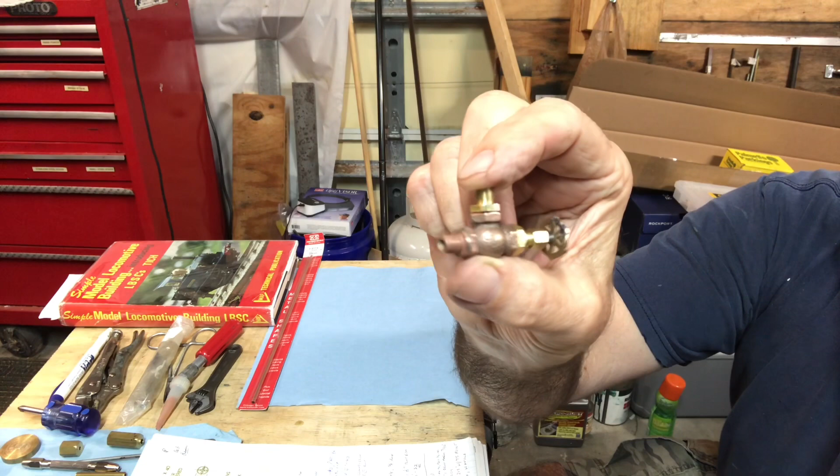We're working on an LBSC Tich locomotive and got a lot of it done if you're following the series. This week we've completed the blower assembly for the boiler fittings, and there's a lot more than two parts to it, but there's what they call the throughfare nipple, which I made out of bronze, that'll go in the front of the boiler. There's also, in the smoke box area, the main fitting itself, and then there will be, and I'll custom fit this at the appropriate time, 5/32 inch copper tube that will be cut and threaded on the ends.

Here's a drawing from the book. If you're following along, this is what we're making this week. So if you're interested, I'll show a couple of techniques and things that worked well. I'll show an error that I made in trying to make the valve stem. I made it too short the first time around, but it was good practice.

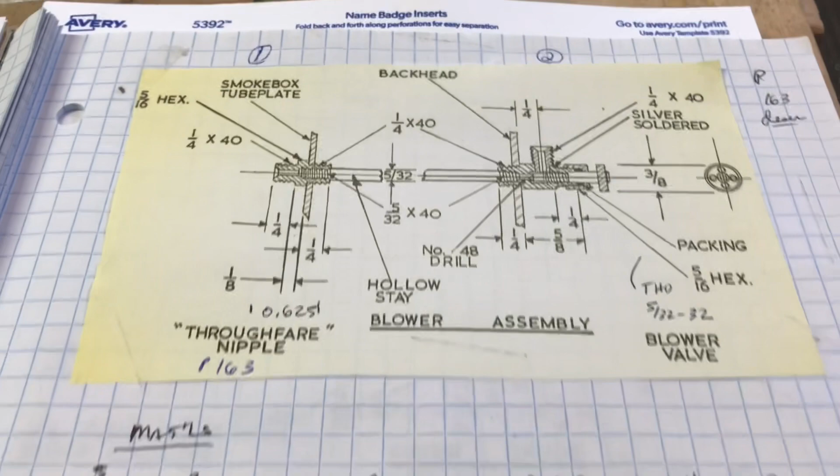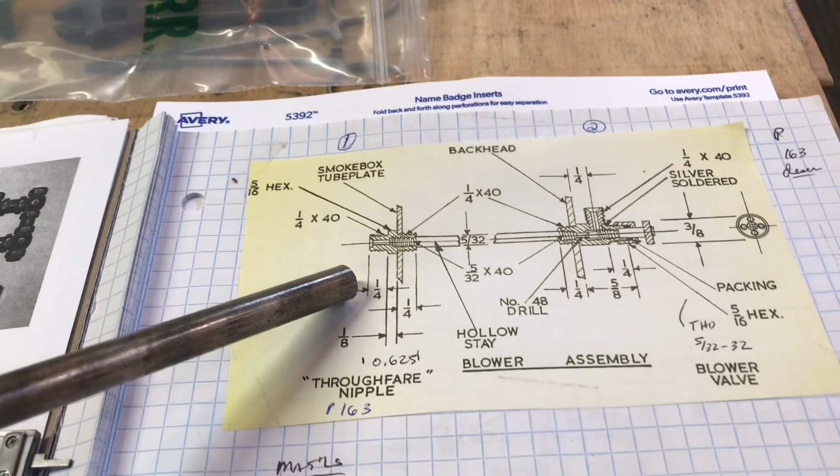The next part I want to make is the blower assembly, which is obviously at least two main parts and then a pipe that connects them. I'm going to start with what they call the throughfare nipple, and I want to point out that this assembly, once it's in the locomotive, forms a structural member in the boiler, and I do not plan on taking it out, so I'm going to make these parts as you would properly for a permanent part of the boiler and use bronze versus brass. Julia pointed that out. It is a best practice to use bronze for the boiler, although if you read the book, LBSC talks about using brass.

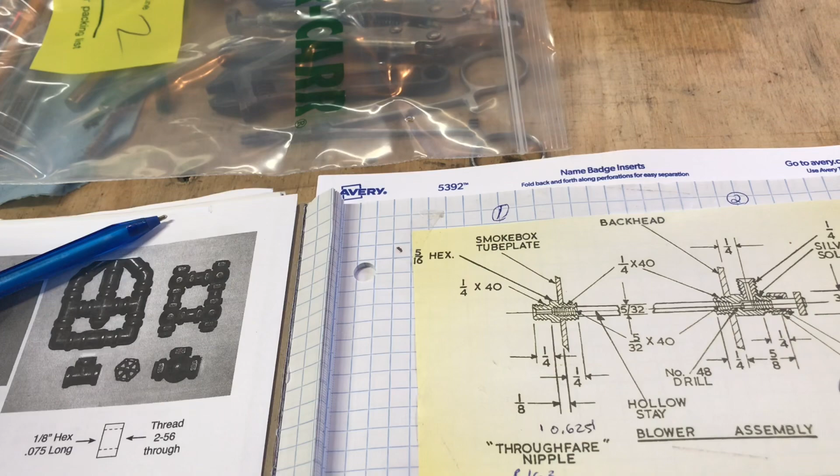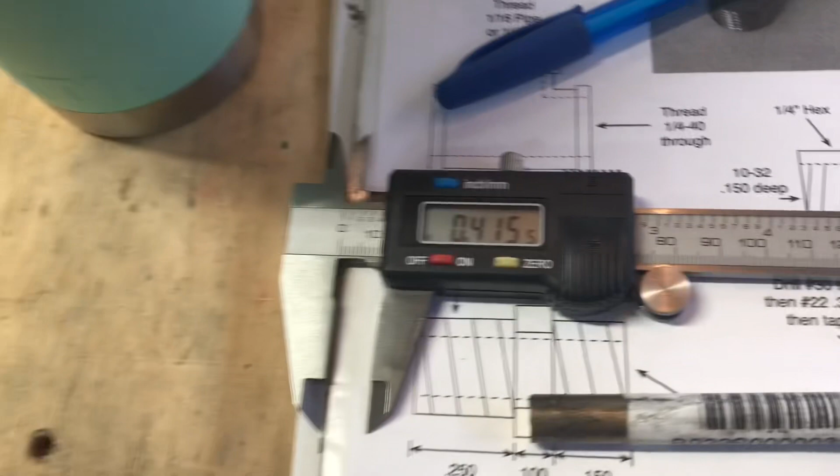Well, I don't have any hex bronze, so I ordered some 3/8 inch bronze rod from McMaster Carr. It wasn't terribly expensive, and my plan is, I'm going to put this in the lathe and turn down a section. This is oversized. It's actually like 415 thou outside diameter, and it's called 3/8 inch, so it won't fit in a 5C collet like it is.

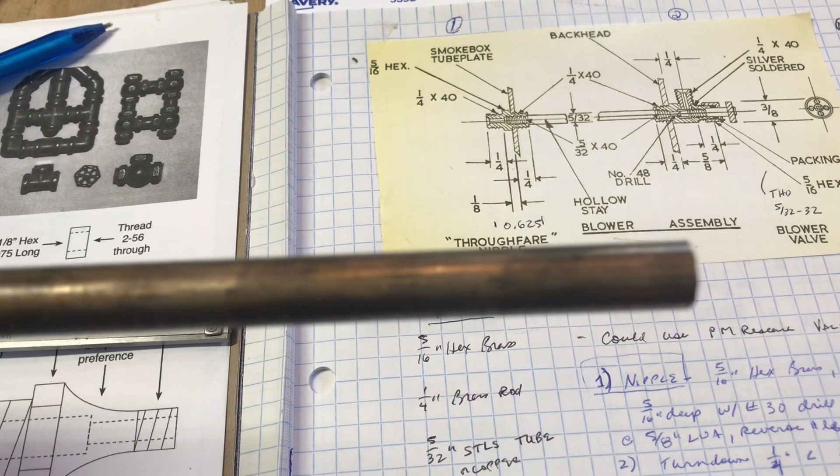I'm going to turn down a significant section of this to actually 3/8 of an inch, and then cut it off so that I can use the 3/8 inch diameter part in a 5C collet, and then use my hex collet block to machine a bunch of this down to a 5/16 inch hex, and then I can start making the part. So I'll show you that briefly.

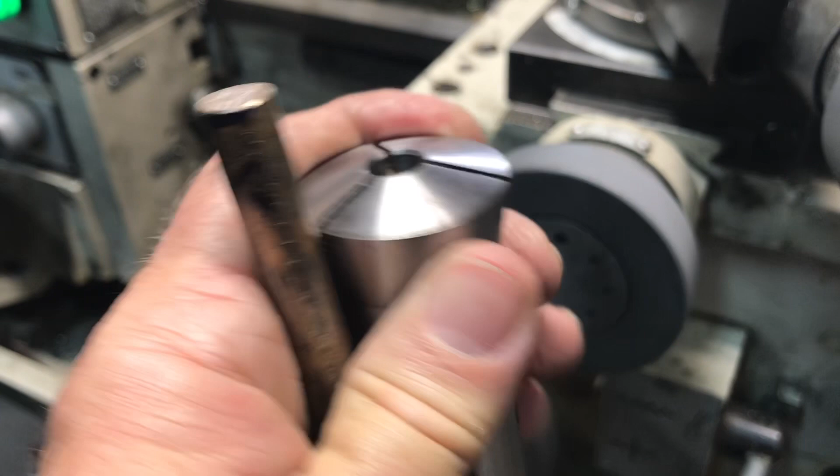I have something else up my sleeve too, because I'm seriously considering using the PM Research globe valve bodies for this part rather than just making it out of stock, but we'll see. I'll talk about that as we go along. Okay, here's the bronze stock turned down to 3/8 of an inch and the 5C collet that I hope to use to make some hex stock.

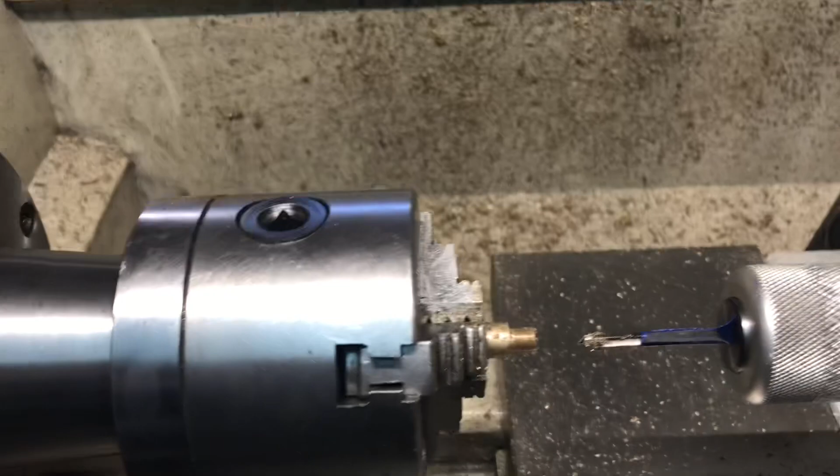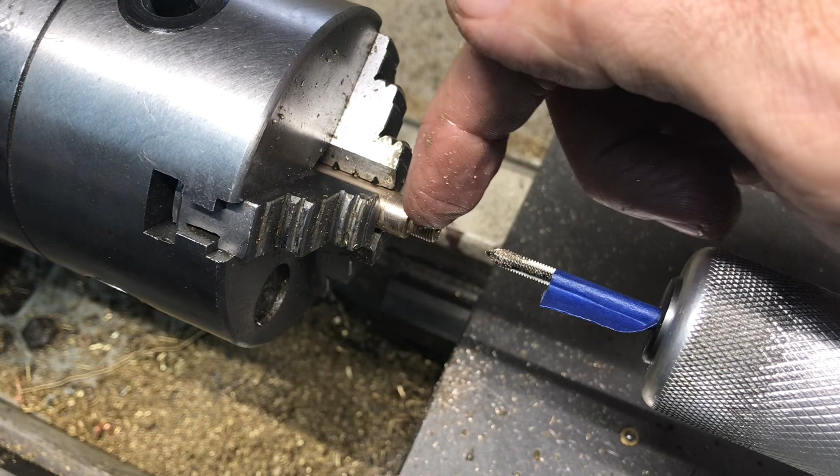In the process of doing this, I kind of messed up a short portion of the bronze, and rather than wasting it, I've decided to go ahead right now and make basically the inner half of the valve that will go on the back where the blower is, where I'm planning to use the PM Research globe valve. So I machined this piece down, 1/4 inch by 40 threaded, 1/4 inch long, drilled it through with a number 48, and then I pilot drilled it and just finished tapping this 5/32 40.

So this will be the part that accepts the pipe that stays inside the boiler as kind of a permanent structural assembly. So now I can take this out, flip it around, and machine the other side. What I'm going to do is leave kind of like a wafer thin division point here, just to make it easy to screw in and out of an adapter, make it easy to screw in and out of the backside.

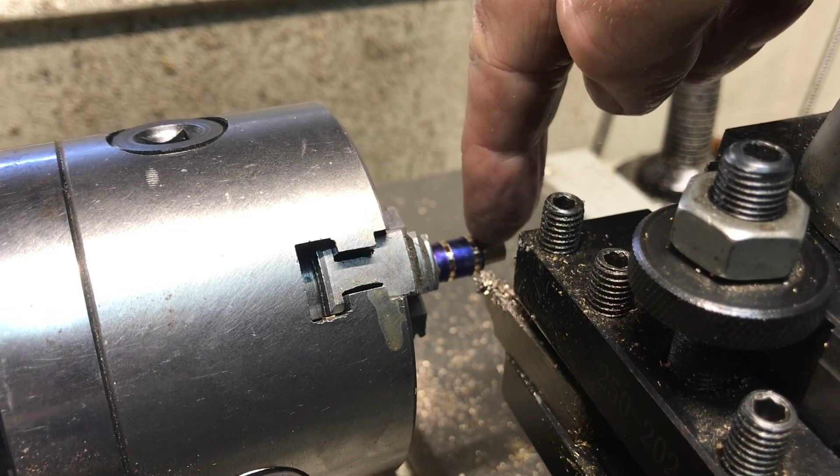So this side is machined like LBSC designed. The flip side is going to be machined like John Bailie designed, so I'll show you that in a minute. I've slid the part out. Ultimately, I'm going to cut it off 5/16 from the rim here. So I'm making a 1/16 inch rim, and then a 1/4 inch portion, which is going to get turned down to a 1/4 inch and threaded, and it's going to have a certain size hole drilled in it for the valve.

But before I remove all this, the best way to support it is by using the existing stock there. If you can see that, yeah. So what I'm going to do, I've made my marks with my cutoff tool, and I'm going to just work it back and forth to work that portion down as close as I can get to a 1/4 inch outside diameter before I cut it off.

Okay, that worked out nicely. So I've got this part down to a 1/4 inch diameter. I got this nice little rim here. It's a 1/16 of an inch wide. That'll be like the buffer in between the boiler side and the valve side here. So all I got to do is cut this off, turn this around. I'll put this in a 5C collet chuck, a 1/4 inch one, because there's not a lot to do. I'm not going to hurt these threads just by threading and drilling this side here.

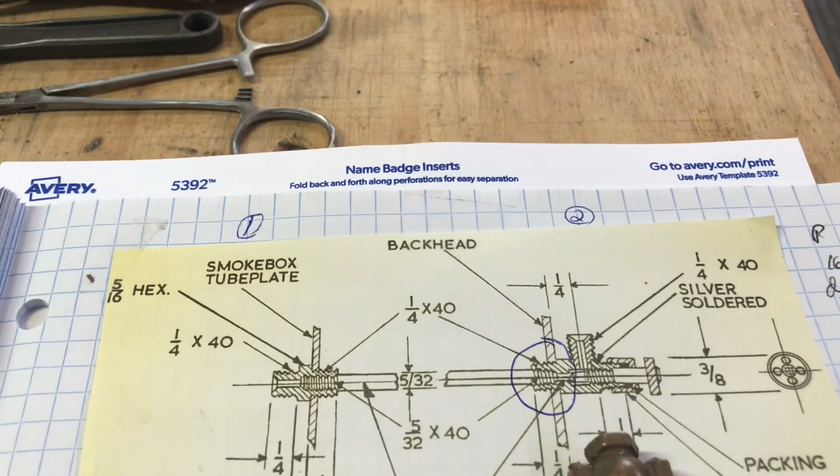Okay, I said the wrong thing. The inside portion of the adapter is only 150 thou long, so I did have to trim that off, and I drilled it number 30 to accept the larger valve. And so what I'm making here is basically the circled portion. This part will go inside the boiler, and it's been threaded to accept the pipe, the 5/32 pipe that will go in and become a structural member.

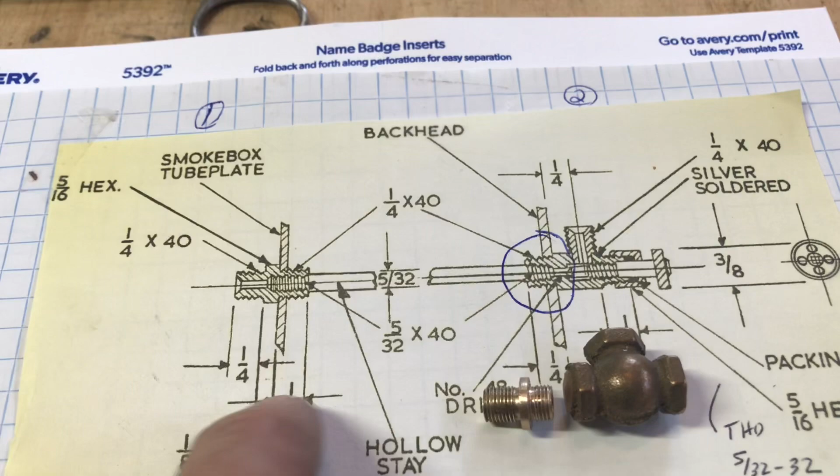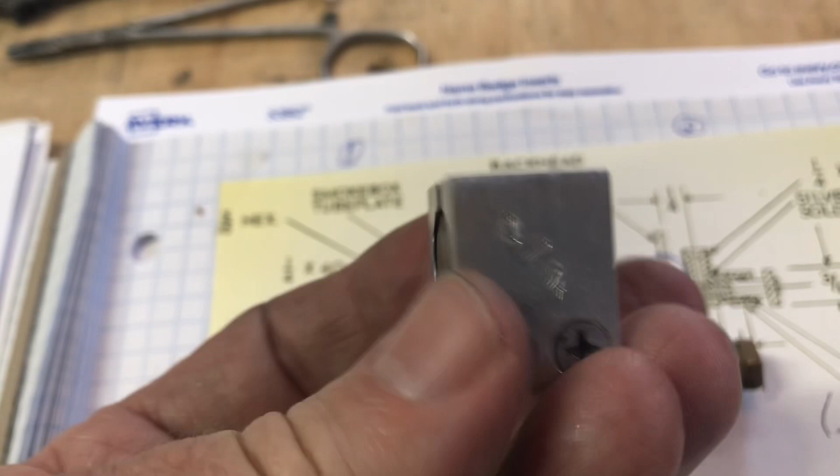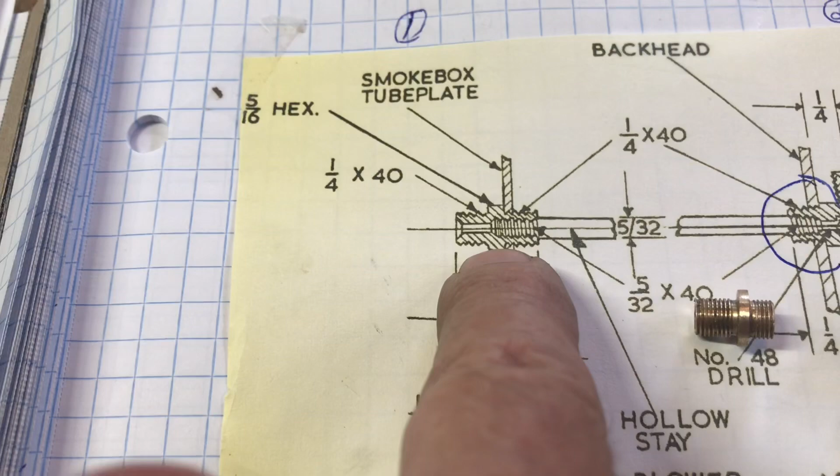This is one of the PM Research valve bodies, and I'm planning on using one or the other of these. This is the little machining jig that I've made for them. I showed this before when I machined a T for a prior part for the boiler clacks. So easy to make out of some aluminum. You definitely need this if you're going to machine these things in the mill. So we'll see about that. Now, speaking of the mill, we'll go over and see if we can make some 5/16 inch hex stock out of bronze with that first piece that we cut off.

The design I'm talking about was published in the Home Railway Journal, a U.S. publication, summer of '09 issue. The gentleman who designed these things, John Bailie, he just recently passed away. The magazine was published by Matt Mason. I don't know if past issues are available, but you could contact Matt Mason. He's active on the Chaski metalworking group under the live steam part, and he could probably provide reprints of this article.

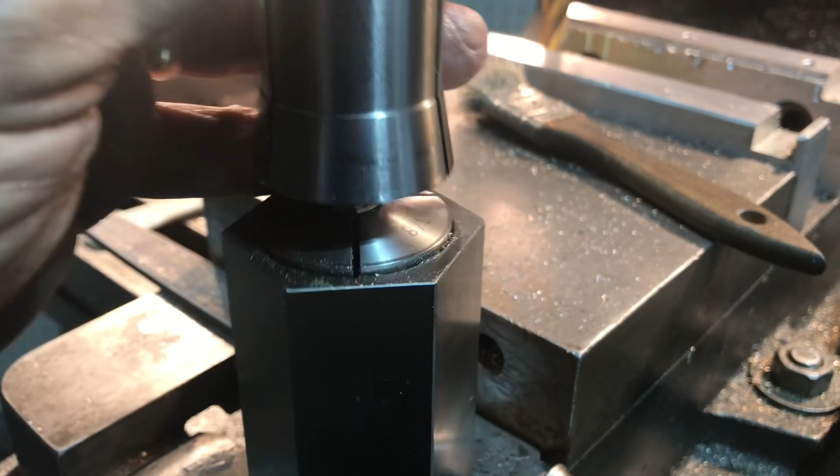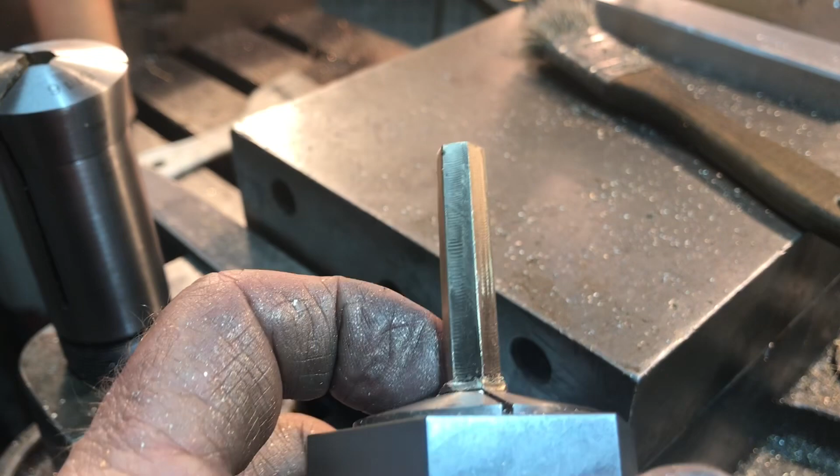Okay, that came out pretty good actually. I was just checking the fit with my 5/16 inch hex collet, and as you can see, you can only do a couple of inches this way at a time. I tried to do it longer, but it was not having it. I was chewing up the end a little bit, even though I had the end supported. So I did cut off the other section. I'm going to leave this together like it is so that I can use this part, get the most out of it that I possibly can, and I'll make the other section as well.

Alright, this is a productive evening. Here is the globe valve that's machined inside the little carrier, little fixture. I haven't taken it out yet, so you and I will both get to see it at the same time. Pretty sure it'll be good. And again, this is done by the John Bailie method, which is just drilled through with a number 5 drill both ways, and I took still shots, and I'll embed those in this video.

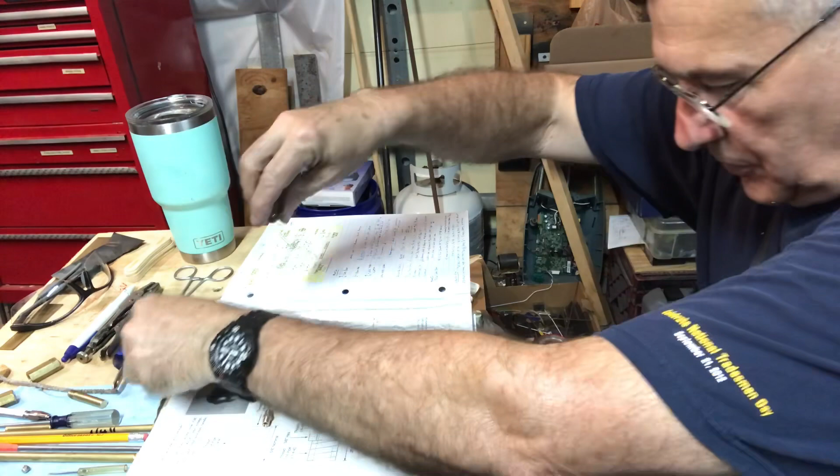It's drilled through with a number 5, which is tapping size drill for 1/4 by 40, and there's the valve, the globe itself. Let me get a rag and wipe that thing off. These things look so cool. That's part of the reason I wanted to use it. It just looks authentic.

Alright, so there we are, drilled and tapped 1/4 by 40 all the way through. So this part here, this is what they call the thoroughfare nipple. This will go in the front of the boiler. This is the center part for the valve, and again made by the John Bailie design. So that's how that's supposed to fit in.

And this part will go through the back head of the boiler, and it's already drilled and tapped for the 1/4 40 tube, just like this piece is. So those will become an integral part of the boiler. The rest of it, I'll need to make a valve assembly for this side, and then basically just another adapter for the top. Let me show you what I mean when I say a valve assembly.

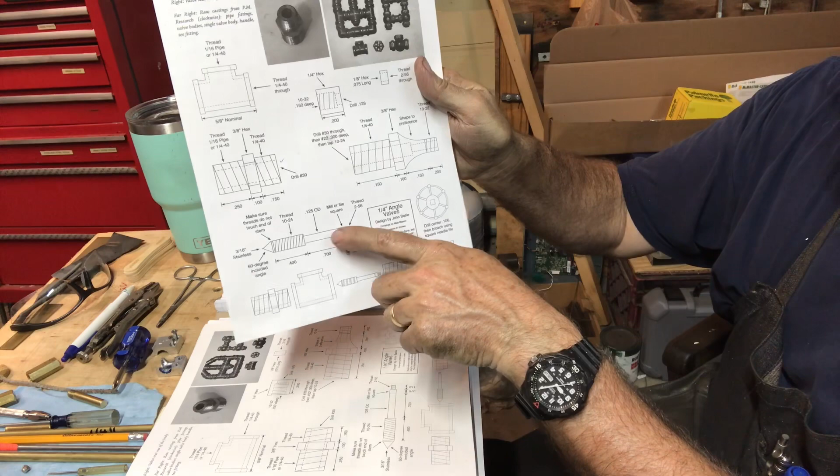I'm going to use the John Bailie method here. So there'll be a top part like this, a bonnet if you will, and then a valve. The Bailie design makes the valve out of 3/16 inch stainless steel versus the 5/32, so it's a little more available. So again, we'll see how this works, but I'm excited about the progress so far, and we'll keep you posted.

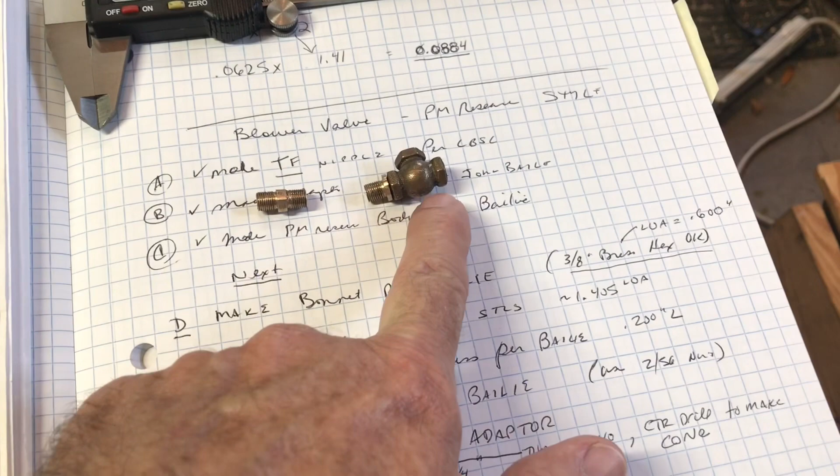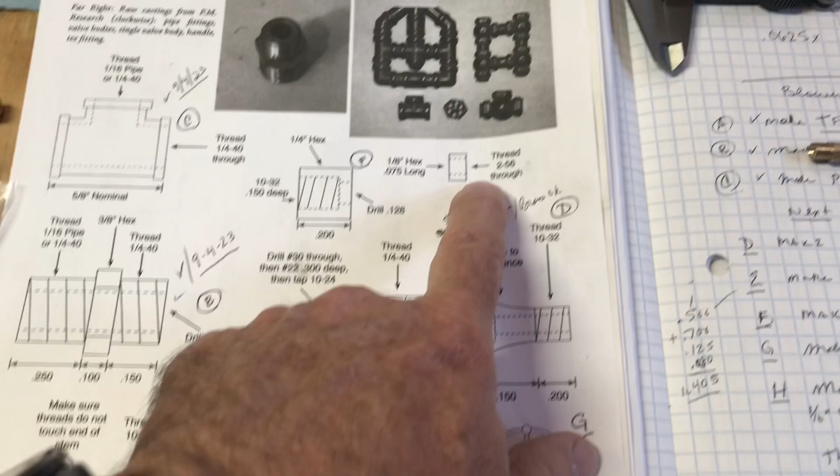I had a work trip this week, so I didn't get a chance to work on a lot of stuff, but I did make a list of the next steps I want to do after we got this far last weekend. I'm going to make the bonnet per the John Bailie plans, and then also make the valve stem by the John Bailie design, and the little cap that goes on the stem, and the nut. I'm going to use some pre-made nuts, so just a few parts to make.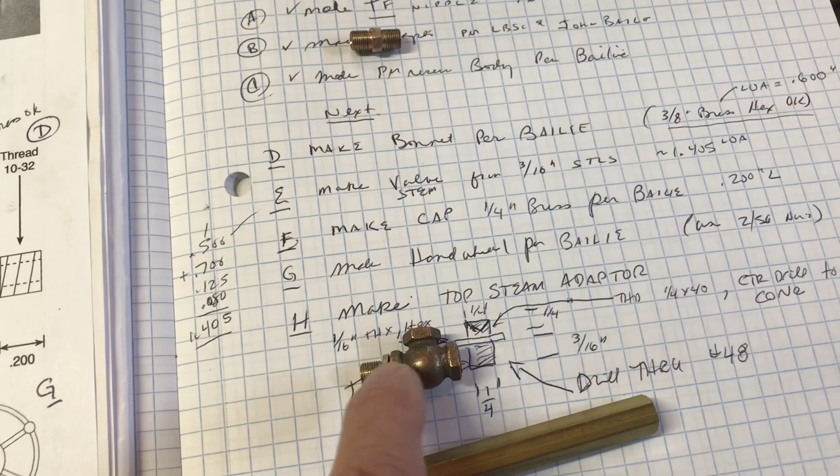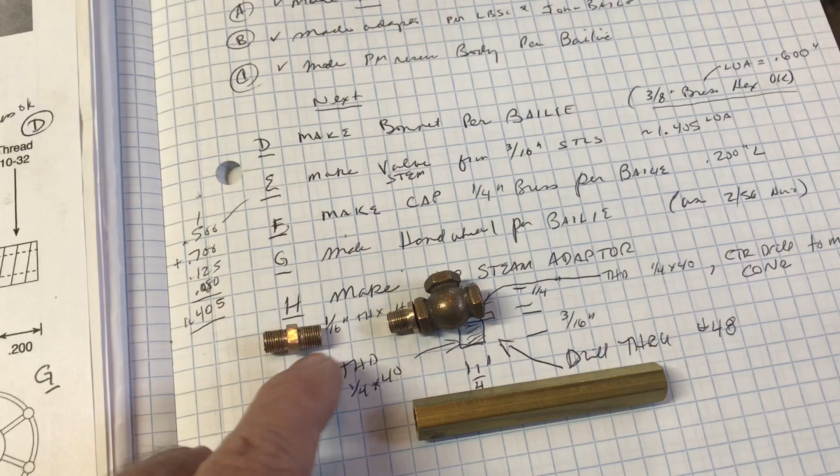Also, I will need to make a custom adapter for the steam intake that'll go into the top of the valve here, because this is the blower valve. So the idea is the little hand wheel that you open will allow steam to come in from the turret and go through the stem all the way out, come out through the boiler, and come out through this bronze piece here that we made last weekend. So several parts to make, and we'll see if we can't finish up this valve this weekend.

Just stopping to show what I do: this is a piece of 3/8 inch hex, and I just rough shape the bonnet, is what I call it, before I do any drilling and tapping. So I've used a variation of regular lathe cutting tools, cutoff tool, some round nose tools and some files to get it to this pretty close shape, because you might as well before you start weakening it by drilling through and tapping it and threading this portion here.

So here we've got the part all formed up. I've drilled it all the way through and tapped inside like it's called for on the Bailie plans, threaded the outside here, formed all this, and we're within a couple thou of the final diameter here. I just need to cut it off and then flip it around and get down to that 3/16 inch diameter, and then thread this for the cap.

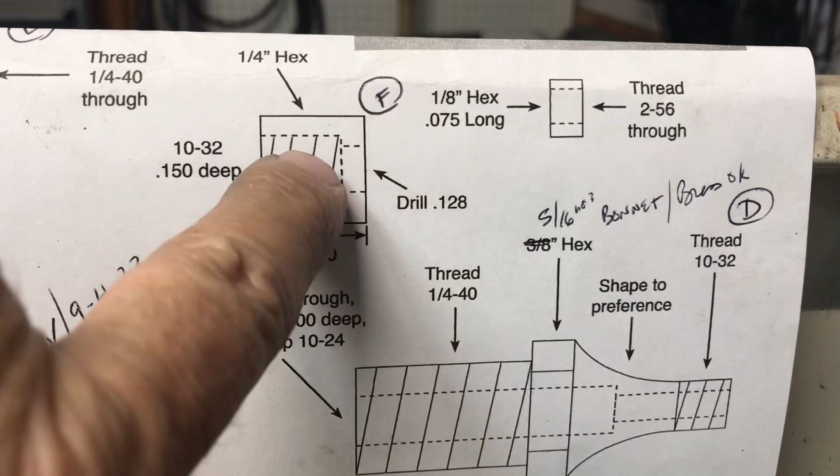Finished the bonnet. Now I'm making the cap, little 1/4 inch hex brass, and it's threaded 10-32 to go on this portion, drilled through .128, which is a number 30. I'm getting ready to cut it off at 200 thou. Well, I did want to show one thing. Here's the part itself before I cut it off and clean it up.

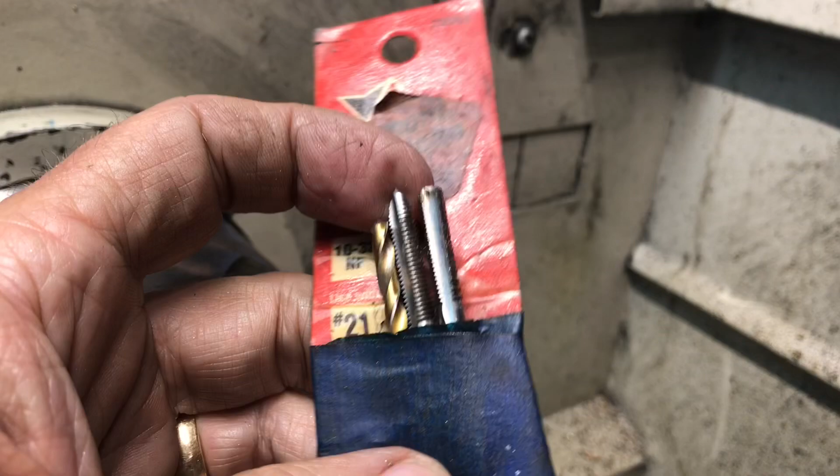But what I do with my conventional taps, I keep the little cardboard, and I keep the appropriate drill and the tap, and then in this particular instance I must have broken off the tip of this 10-32 tap at some point in time, and rather than discarding it, there was plenty left. As you can see, I ground it down so that only a thread is wasted, and I use it as my bottoming tap. So just a thought for you.

And then I keep them in a Plano little fishing tackle box, which is exactly where it goes, right here. So I've got all my conventional sizes in here. I keep my miniature ones other places, but that's how I organize my taps and tapping size drills.

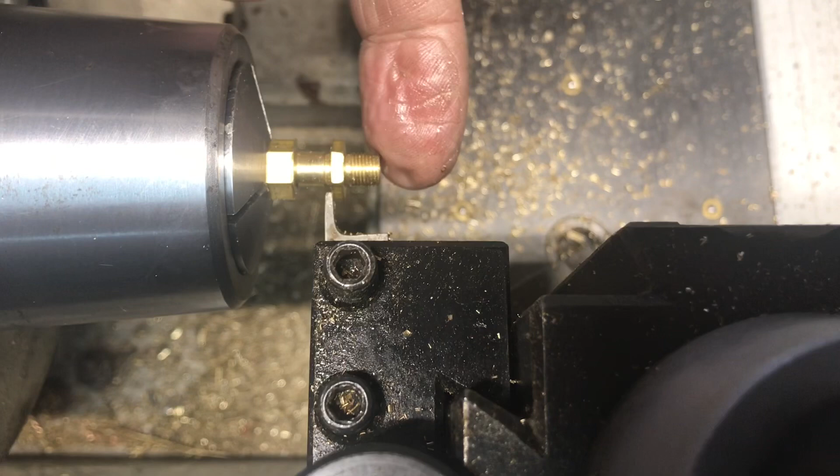Here's the top adapter, what will be the steam inlet. This is a 250 thou portion over here, where the steam supply will come into. I just used a center drill to create the pocket there for the cone, and then I've used my cutoff tool to work this diameter down to 1/4 inch here, and I just have a 1/16 of an inch little spacer there from the hex, and I'm going to move this out, and we'll cut this off at 150 thou to go in. Then I can turn this around and thread this portion.

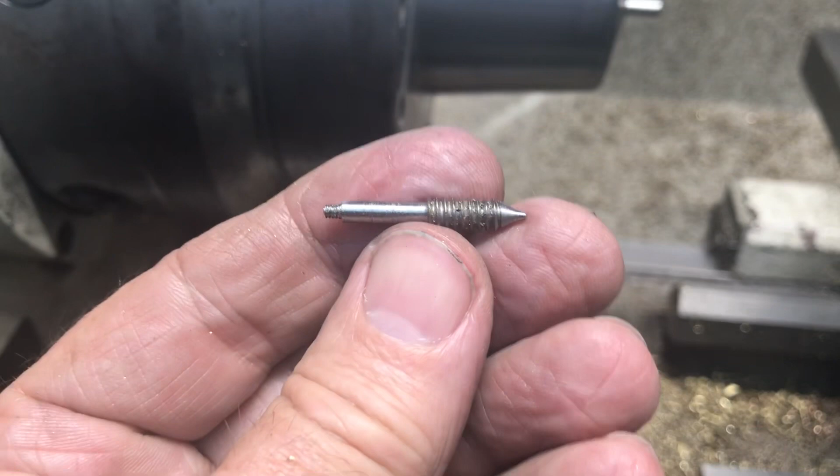Well, this is kind of like what the valve stem is supposed to look like, but I messed up and I made this one way too short, so oh well, I'll save it because it's generally good, if I ever needed a smaller one. But what I'm going to do is start over again. I'll just cut off a piece of stainless steel 1.5 inches long. I'm going to make the cone tip. I won't bother showing all this stuff because it's similar to the other things I've made, but I'm going to do just a little piece at a time. I'll bring you back as we make our progress.

Just a note, the point is almost completely machined here. There will be a few more passes needed. What I'm going to do is stop now and put the threads on this, and then I'll come back and finish up, make the last couple of passes just to make sure that the cone is the cleanest and nicest part, because when you cut the threads, they do upset the metal a little bit, and you want to make sure the cone is clean and separated from the threaded portion.

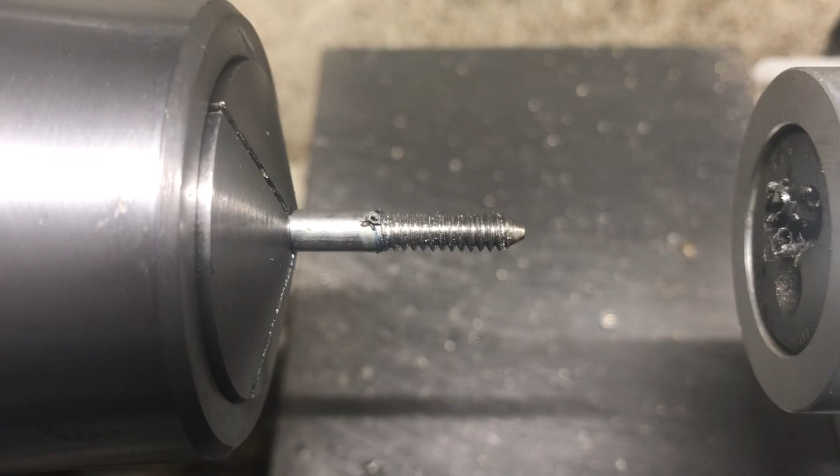This is what I'm talking about, using the tailstock die holder to thread the number 10 threads on here. It's 10-24, so it's a coarse thread. You can see it really comes into the cone area, so that's why I left a little bit. Also, I threaded a little bit more than 400 thousandths of an inch so that when the cone gets done, then I'll have to thin this part here. I can just be exact about leaving the 400 thou. But now I'm going to reposition the lathe cutting tool and clean up the cone.

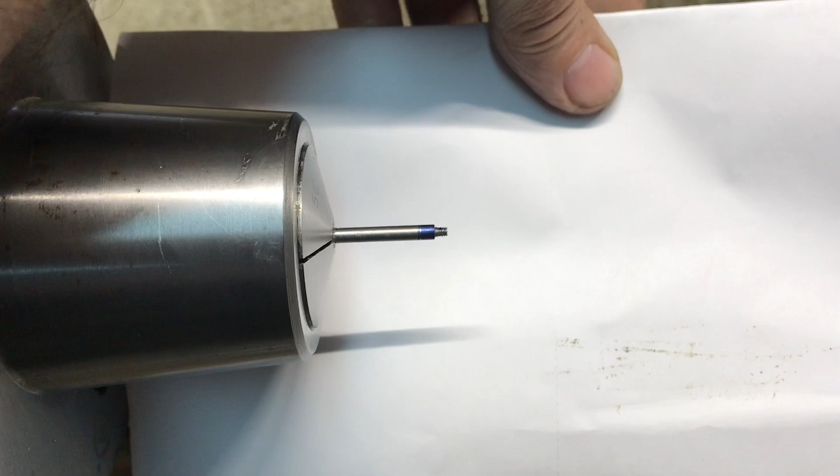Alright, this stem's come out a lot better so far. Machined it down to an 1/8 inch and filed it smooth. I've machined the little tang at the end down to just under 90 thousandths so I could thread it for the 2-56, and I just put a little scribe line at 700 thou out from where the threads are. The threads are right inside the collet, so that's the portion in blue there that can get filed down to a square for the hand wheel.

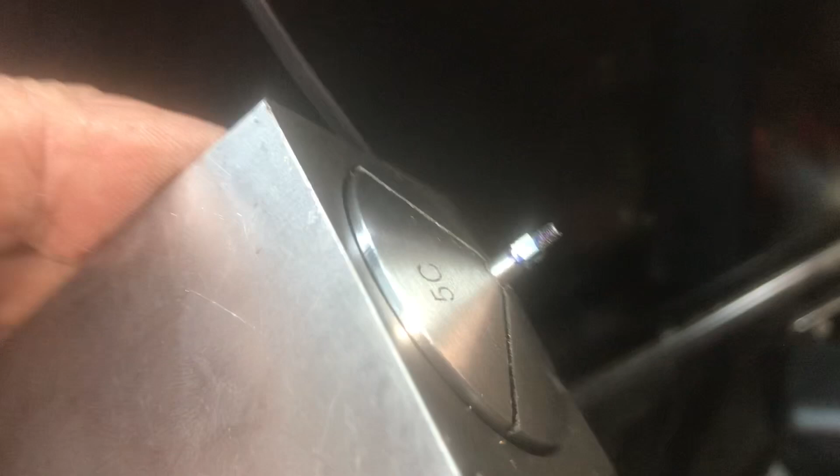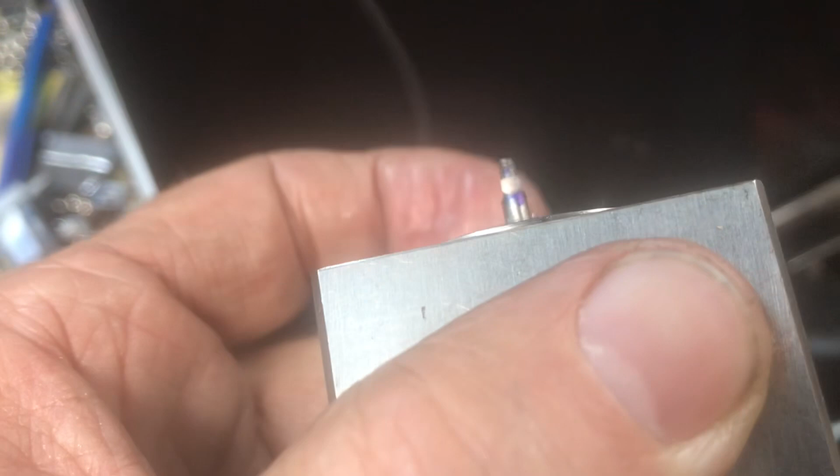Here's the stainless steel valve stem. I went ahead and milled this down, obviously using the 5C collet block. You can see what I did to support it. I put it in backwards through an 1/8 inch collet, and it gives it pretty good support. I was able to machine that down, so I have a nice little 88 thou roughly square there, and I can proceed with drilling and filing out square the handle.

Alright, we've drilled the little handle with the number 36 drill, and now we can take it out and file it square. Here's the completed valve screw with the handle and a little 2-56 nut on it. So we're going to try to assemble everything together, and I am going to silver solder one of the fittings into the body, so I'll show you that in a minute.

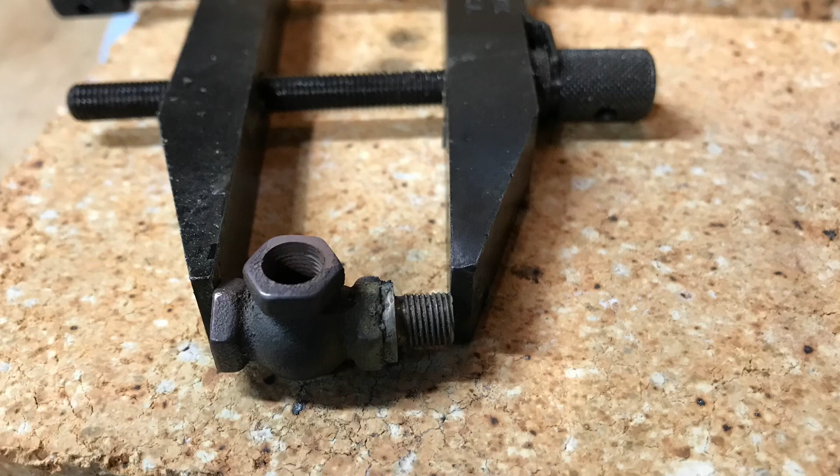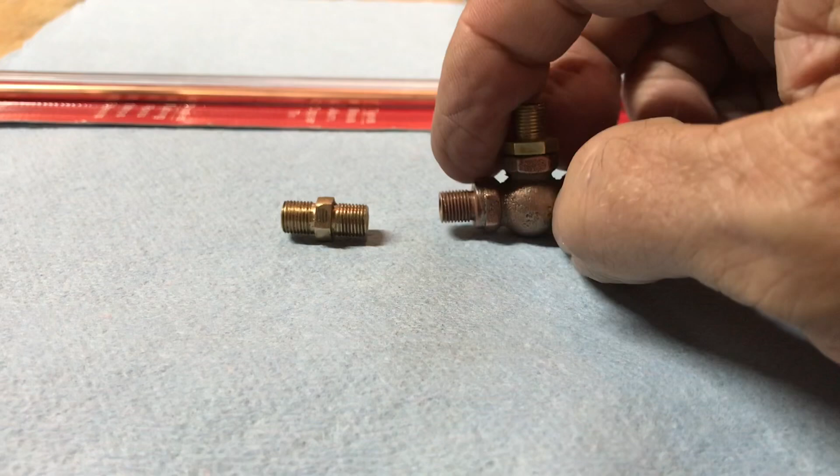It's really interesting. You can see the pieces that I made out of bronze after they've been heated, like this adapter. When I heated it and silver soldered it onto the bronze body, you can really see that coppery color in contrast to the brass parts that comprise the rest of the assembly. And it's funny, this is bronze as well, but it hasn't turned coppery. I haven't soldered it in. This will be screwed into the front of the boiler in the smoke box area.